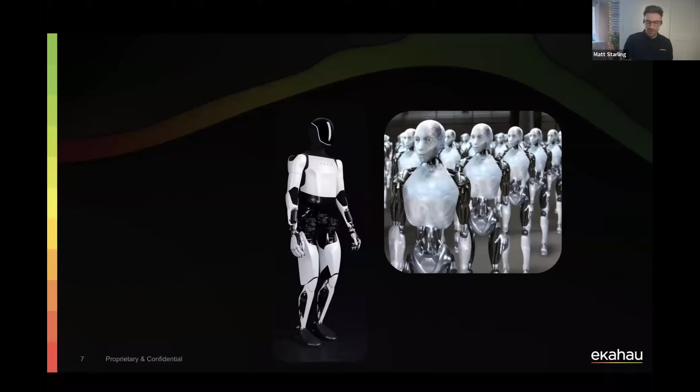But in reality, most of the way that I think AI in warehouses and distribution centers is being used, it's more like robots in this kind of scenario, helping move things along, build things, and ultimately we're going to see a much bigger demand on networks with the use of AI and these kinds of machines there.

I, Robot is a new film? Geez, I'm old. Okay. Actually, I think I saw when I was doing some research here, there might be an I, Robot 2 coming out, which could be quite interesting as well.

Okay, so natural language processing is what powers things like voice assistants. So if I was to say, hey Siri, play some house music, or Alexa, turn off the lights, did I trigger anyone's assistant? I can see my Siri is trying to go mad and it's about to put on some mix, now playing on Spotify. I don't know if you can hear that in the background or not, but yes, I've managed to get my assistant going.

But yes, those are some of the ways that we can leverage AI and natural language processing, or even talking to these, I want to say chatbots, but probably not the right term. But I think like ChatGPT, Marvis, Grok, those kinds of things. Are there any others out there? What's your preferred AI chatbot solution? Do you use ChatGPT, Grok, Marvis? Is it something else?

Let us know if I missed anything in the chat there.

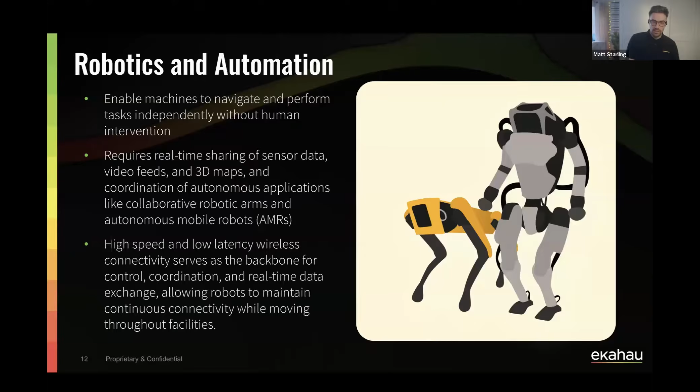And Wes, I think you have a story about a customer you worked with quite recently with similar devices and the importance of having a good Wi-Fi network for those machines. Yeah, there's been this trend of, with newer generations of Wi-Fi, you have more bandwidth capabilities, you can enable AR, VR type use cases. And I've always thought this is kind of fluff. But we have customers who actually do it.

So with robots on Wi-Fi, just transmitting immense amounts of data, telemetry, from a development standpoint as well as day-to-day operations, even 5 gig is a struggle. So 6 gig has been what has enabled this use case. But it's to support the AI that's native on that robot.

Yeah. I think ultimately with more and more network devices, AI devices, the need for a better performing wireless network has never been greater. And take into consideration the management of QoS. If you don't implement QoS on your wireless and wired network, there is a real risk that some of these applications and devices are not going to get prioritized, and likely some non-business critical applications may end up winning the chance to transmit their data over the air and across the network.

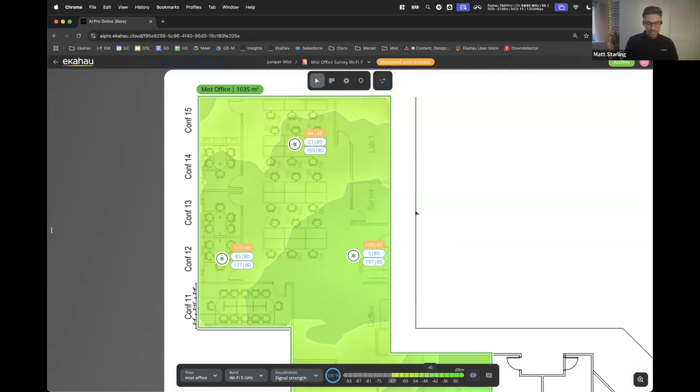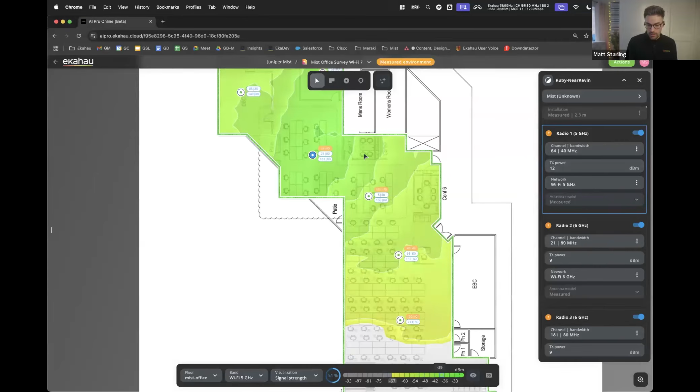So this is the survey data in Ekahau AI Pro Online, and I've not drawn any walls here. I've not drawn any obstacles or anything like that. And a question that we get asked a lot as well is, can the Sidekick 2 survey Wi-Fi 7 access points? And what you can see here is we have Wi-Fi 7 access points from Mist. So you can see the coverage now coming from this access point, and you can see 6 gigahertz and 5 gigahertz, 2.4, whatever you want.

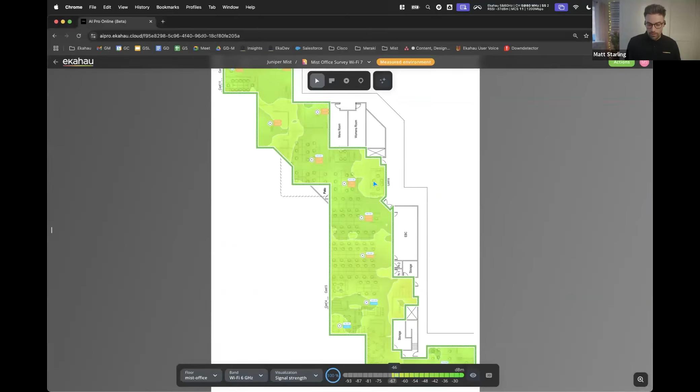So the short answer is yes, Sidekick 2 can measure and validate your Wi-Fi 7 access points. The main thing is that it scans across 2.4, 5, and 6 gigahertz. So Mist have deployed pretty much Wi-Fi 7 access points all throughout their office. There was just a couple of access points down here that are not actually Wi-Fi 7.

And what I wanted to show you that you can do with Ekahau AI Pro Online is if I click on this access point, let's say, for example, they want to upgrade this AP to Wi-Fi 7, but maybe they want to relocate it to a different location, perhaps put it inside this meeting room. Traditionally, what I would have to do before is draw all of the walls, all of the windows, all of the attenuation objects, make sure I've configured them accurately, and then I'd be able to simulate and see changes in my environment. But what I can actually do now is I can just grab the access point and move it.

I know everyone at home is losing their minds to the house music that Siri is still playing from earlier.

But no, this is really cool. So the Ekahau AI Pro Online is using measured survey data from Sidekick 2 and AI machine learning to understand how RF propagates in the space, and then you can account for changes and moving things around into different positions. We know when there's walls, we know when you've got heavy attenuation objects and things like that.

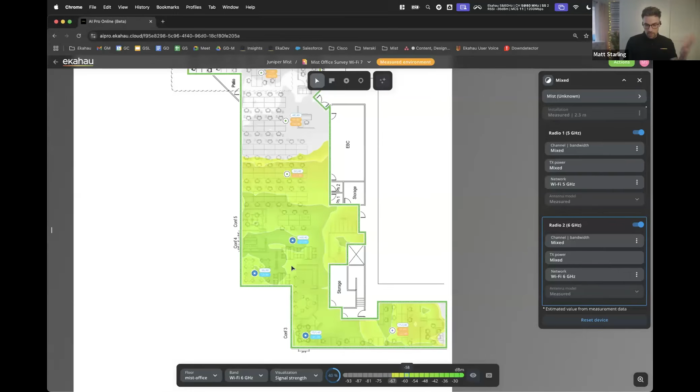So maybe Wes wants to know what is the coverage going to look like if I swap out, I think these are maybe AP45s, if we swap them for the AP47. So I've just grabbed those 3 access points. And what I can do now is I can just select Mist as the vendor, and I can scroll down. I can take a look at the AP47. And as soon as I select it, you see it's now instantly changed to Mist AP47s. And again, if you want to make some changes, like move them around, you can still do that.

So the way that a lot of people are using this functionality in Ekahau AI Pro Online right now is that, let's say that you've got an older 2.4 and 5 gigahertz network. It's due for a Wi-Fi refresh and upgrade lifecycle. Wes mentioned earlier how important 6 gigahertz is, so we want to upgrade to 6 gigahertz access points. Even if you survey and measure a 2.4 and 5 only network, you can simulate upgrading to a 6 gigahertz capable access point using this, and you will see the 6 gigahertz heat maps. So that's pretty cool.

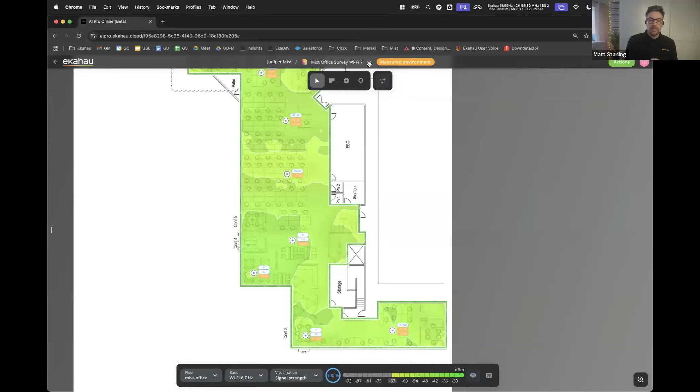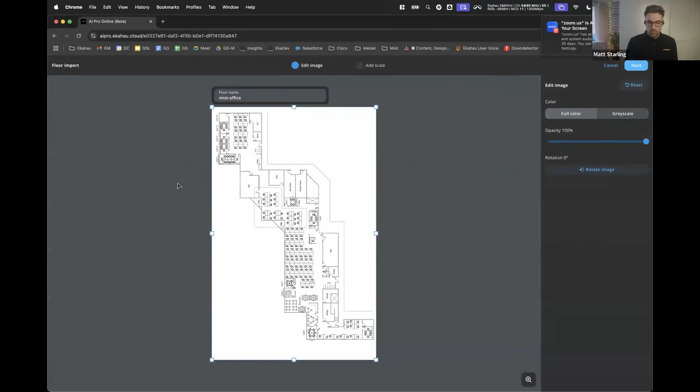Let me show you another way that we use AI in Ekahau AI Pro Online. So let's say that we couldn't get Mike to the Mist office for the webinar live demo, and we wanted to design Wi-Fi 7, but from scratch, like that traditional methodology of uploading a floor plan, scale, draw your walls and obstacles, etc. So I'm going to design from scratch. I'm going to pick the Mist office. You can see that this is just a PNG file, so no CAD, no PDF, flat PNG file. I'm going to hit open, import the floor plan, and if I needed to now, I can decolor, I can rotate, etc., but this is all good.

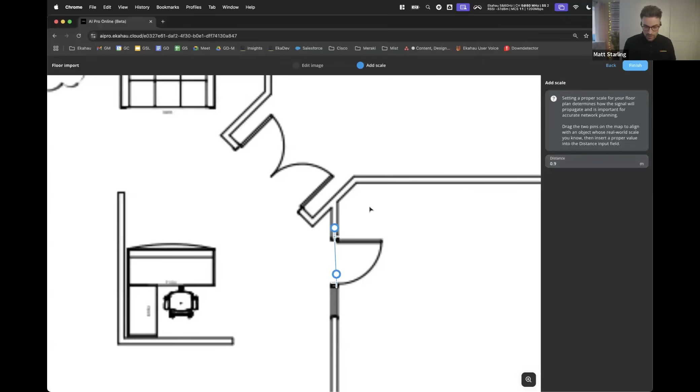And I'm going to give it a scale, and Wes assured me that their EBC room door is 0.9 meters in width for a scale. I know everyone thinks I am a terrible Wi-Fi designer now because I keep using doors as my scales, which I know that we shouldn't be doing, but never mind. I trust Wes. So now that I've finished adding my floors, I can simply hit finish.

And now, quick question to everybody in the chat: how long would it take you to manually draw all of these walls, doors, windows, and obstacles for this floor plan? 10 minutes, 20 minutes, 30 minutes, an hour, 2 hours, 1 day, forever? Yeah, okay. An hour, 1 month, 30 minutes, 10 minutes.

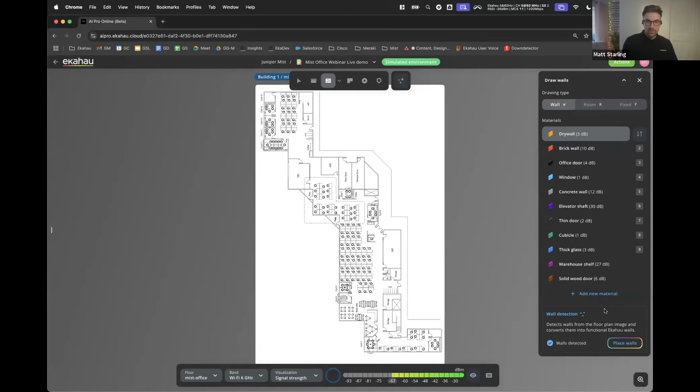Okay, some people are pretty fast wall drawers, but okay, even if someone said like 15, 20 minutes, too much. But did you notice down here, whilst I was trying to buy myself a little bit of time, we have this wall detection here. So even on a flat PNG file, we use AI to scan the floor plan, and now I can simply hit place walls, and we're going to place the walls on the floor plan, even on a PNG file.

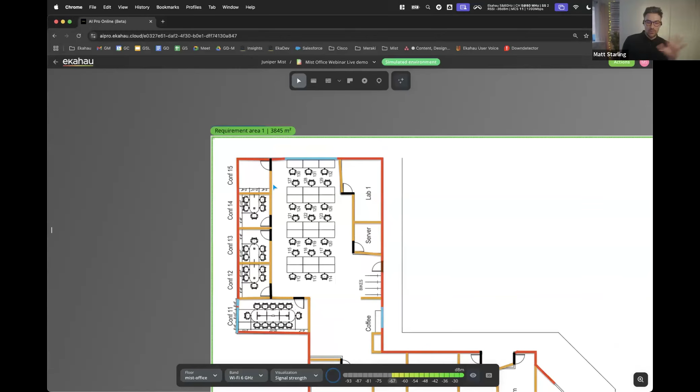And if we inspect this, look at how good of a job this has done. Like, this is crazy to me as well. It's not just done one type of wall type throughout the whole floor plan. It's done brick walls for the outer walls. We've got windows, we've got drywall, we've got doors, and it's done such a good job.

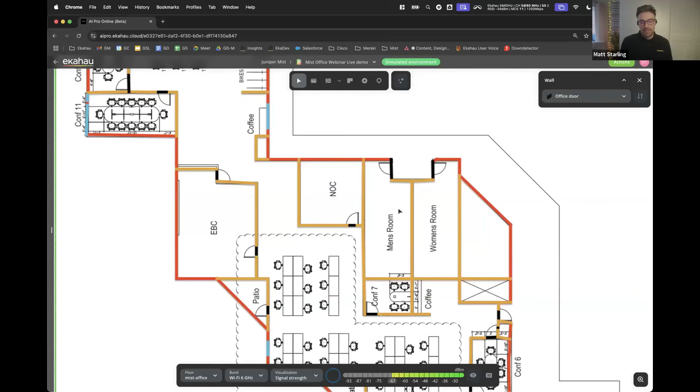Now, don't get me wrong, if I'm being pedantic, which of course I always am, I would come in and I would look at that and go, oh yeah, you know what, I need to fix that a little bit and fix that a little bit. Oh, and this wall here didn't quite get drawn, but I can come here and spend, I don't know, 30 seconds tidying this up a little bit. I can go into 3D, make sure this has been built and done properly. And I'm like, yeah, this does look good to me.

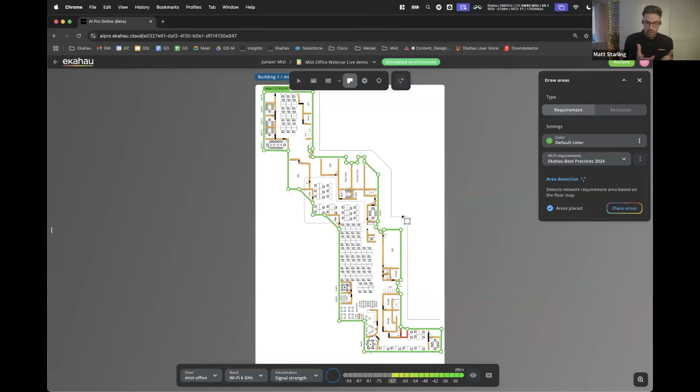So if I was to place access points now, you would see coverage would go everywhere and bleed outside of where the actual office is. So again, we can use our area tool, and we have this area detection. At the moment, you can see this green area across the whole floor plan. So now if I hit place areas, watch what it does. It now snaps to the floor plan too. So again, this is how we're using AI and some automation to just make your lives a bit faster and a bit easier and save you a bit of manual time.

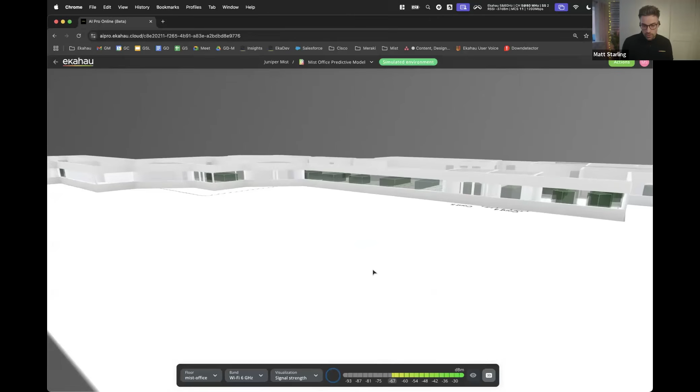So I'm going to jump into this version of the file that I built the other day, because we don't yet have attenuation object detection, which is coming soon actually in AI Pro Online. It's basically the same file, but I've drawn in the desks and stuff, because I think this looks really cool and nice in 3D. So you can see here that we've just got the floor plan. We've not done anything else.

So why don't we use our AI auto planner and see how many Mist access points we might need to cover this space. So what I can do is come in here, search Mist. Let me pick the AP47, hit enter and place devices. So now it looks at the coverage, the channels, and it saves the results, and it's placed some access points for us on the map. Brilliant.

So that was one way of using the AI auto planner, and I can see the Wi-Fi 7 access points throughout, but I actually just want to do something else very quickly. I'm just going to delete these access points and start again from scratch. What I want to show you is that you can do this completely manually, or what I would refer to as semi-automatic, and also automatic. So let's say that this is a good suggestion to place this access point in this meeting room. I would place an AP here.

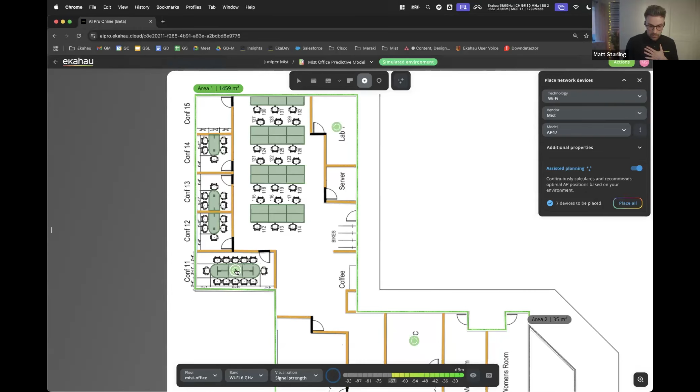So I simply place an access point in this location, but it's also recommended to place one in this lab room. And now Wes might know, you know what, Matt, we can't get a cable into the lab room, or we can't mount an AP in here. So it doesn't really make sense to place an access point in here. Or actually, let me use this room here as another example.

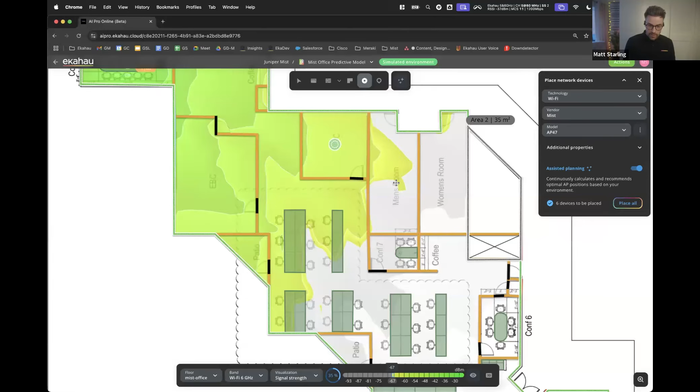So what will happen if I decide to place an access point in the most important area in the office? When I place it here, the AI will then recalculate and come up with new suggested locations. So if I don't pick the exact location that we're recommending, it doesn't keep the old position. It will actually look at that and then make recommendations and suggest other ones. So you can do this manually, automatically, semi-automatically, whatever your preference is.

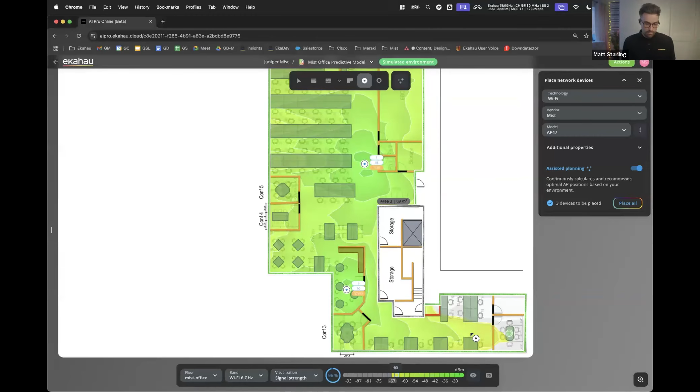And then again, of course, if you want to then review your space and you can see it in 3D, I never get tired of looking at it. It looks very nice and cool to me. Okay, so that was a couple of ways that we can leverage AI machine learning.

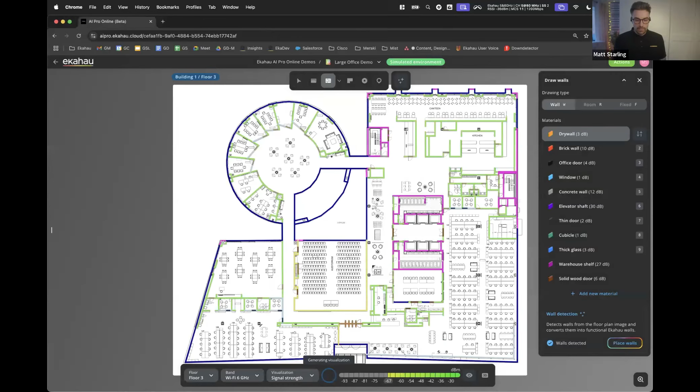And I want to show you a couple of new features in Ekahau as well. So I'm going to jump into a large office demo file that I prepared. And what we've got here, let me just quickly go into 3D. You can see that we've got everything built out ready. So we've got all of our walls, doors, windows, furniture.

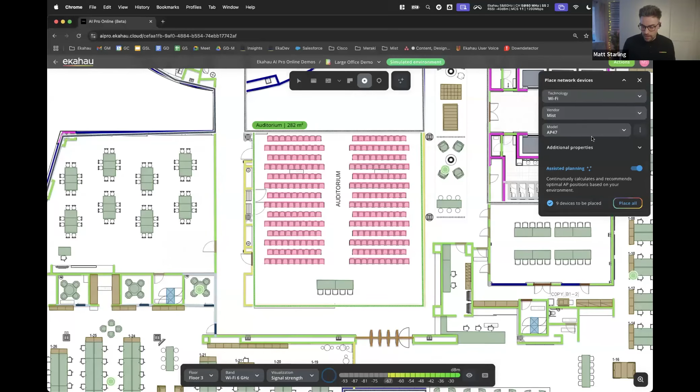And what I really want to pay close attention to is this auditorium. So we've got this auditorium space and I just want to design for here. So what I want to show you actually is if I place a Mist AP47 in the auditorium into this location, we can see that the signal strength goes pretty far. But we have a new feature available in AI Pro Online actually for capacity planning.

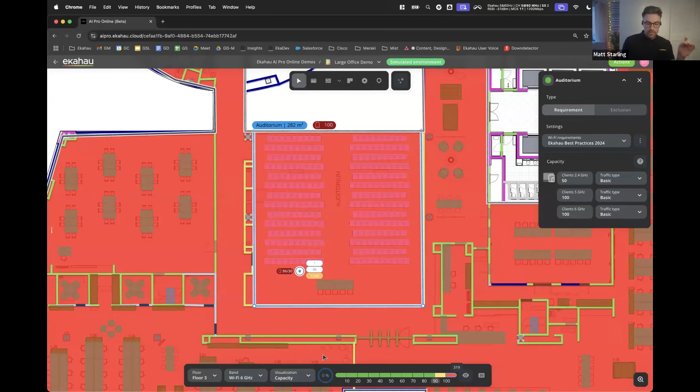So if I switch visualization now from coverage to capacity, you can see that it goes red. And if I click on the area, you can see that I've defined some requirements for the amount of devices in this area. So I think there's like 250 odd seats. So I put 250 devices, some on 2.4 and the rest across 5 and 6 gigahertz. So at the moment, coverage in the auditorium is fine using the Mist AP47, but capacity is failing.

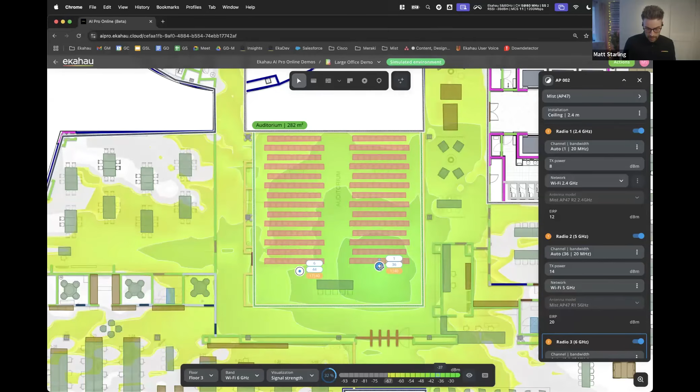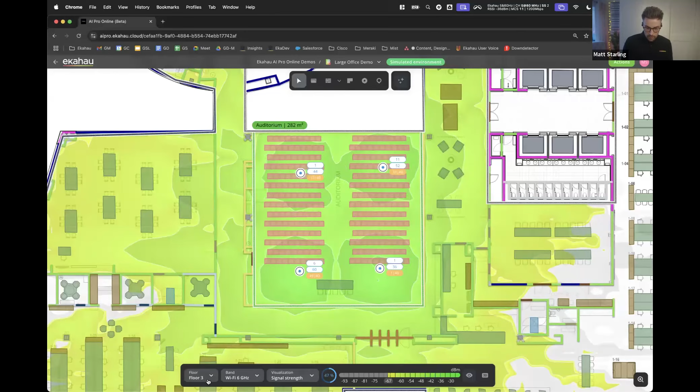So now if I just copy and paste that, I need to add a few more access points. Let me add them in over here and then one over here. Okay, so we've got 4 access points in the auditorium. Let's see if we're now meeting our capacity requirements. And we are, okay? So we no longer have any more than 30 devices per radio. So this is now passing and meeting our capacity requirements, but we actually have something else new in Ekahau AI Pro Online called our inspect tool.

So I'm going to just go back to the signal strength view and click on the inspect tool. And what that does is if you place this on a map, it's going to show you the different access points that you could potentially be connected to. So the primary coverage and the secondary coverage. And let me just zoom in a little bit more.

And let me just show you again, if I move this, can you see... it's no good. I'm getting my finger out to point at my screen, like you guys and girls can see where I'm pointing on my screen.

But if you look at the top left of where my mouse is at the moment, you can see it says connected, and at the moment it doesn't recommend anywhere. Oh, down the bottom right now, you can see it's suggesting this would be the next best AP to roam to.

Well, actually, let's just do a little bit of a simulation. Let's say that I come down this hallway and you can see that I'm connected to the AP top left. As I walk in through this door and walk past that access point, at no point as I move around the auditorium does this suggest that a device is going to roam to another AP. So even though technically our capacity is good in here, the likelihood, from a client device perspective, of getting it to roam from one access point to another one is quite low. So most devices will come in and just stay connected to this access point.

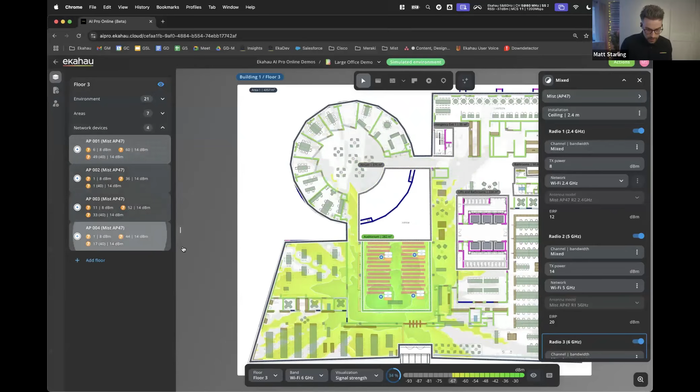You're gonna have to rely on the infrastructure. Maybe you can do some client balancing and move things around, but really you want to try and control this from an RF perspective. So you might be like, well, Matt, can we not just turn down the power of the access points? Okay, well, I hear all of your questions. Let me grab the devices and then let me turn down the transmit power on 5 and 6 to something like 8 and 8. Hit enter.

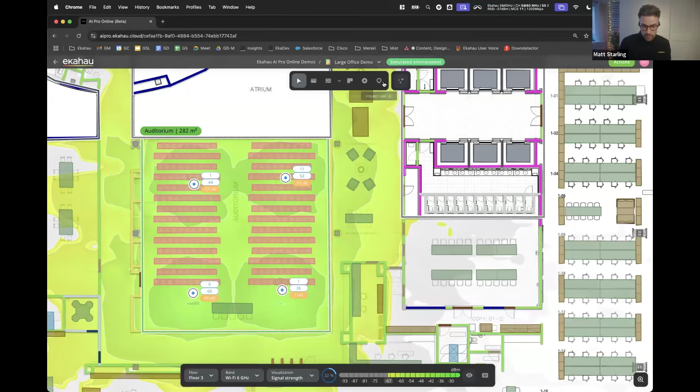And again, if I just zoom in for everybody, zoom in here. And now look at the coverage. You can still see that this access point is pretty much covering the auditorium really well. So if again, I go back to the inspect tool and simulate moving it around, at no point does that connected change.

What should we do differently in this scenario is leverage directional antennas. We want to use access points that can support directional antennas. Mist actually have a new access point, the AP47D, which has inbuilt directional antennas. So regardless if you're in Europe, US, or whatever, we can now use an access point that has inbuilt directionality.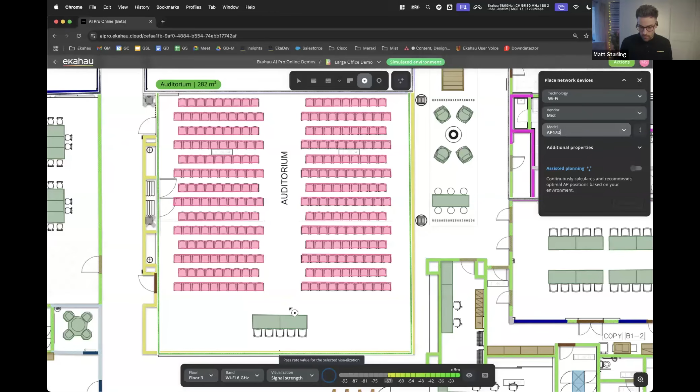So I'm going to pick the AP47D, and place it on the map, and change the transmit power down a little bit to 8 and 8, hit enter. And then let me put in the 4 access points in the same sort of locations.

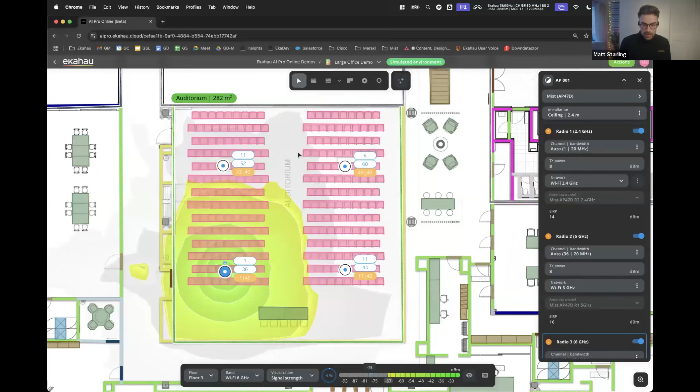Okay, cool. So now we can see the coverage from these access points. Let me go back to the inspect tool, zoom in a bit, and run the same scenario: let's say we've walked down that corridor and come in through here. We're currently connected to this AP in the top left-hand corner. But let's say I want to go and sit in the bottom right-hand corner.

As I walk over here, you can see now I've actually roamed to this access point. Again, this is all theoretical, but having access points that can control the cell sizes of the radios by antennas, when you're designing for auditoriums, high density, things like that, this is a really good way that you can design to meet your capacity requirements.

So a quick demo that I just wanted to show everybody, and also I wanted to show off some of the cool new features that just came out this week that you might have missed, and you can now go and play around with yourselves.

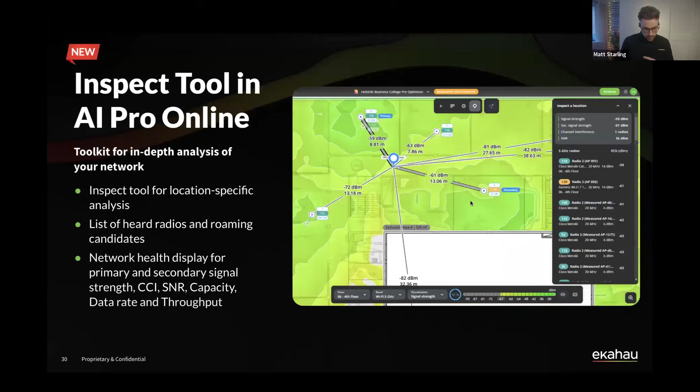Let me just jump back to some slides because the one thing I want to talk about is our integration with Juniper Mist. You can leverage Ekahau to provision your Juniper Mist dashboard, your floor plans, your AP locations, and some other things. So if you've got a site with lots of access points, once you've done a survey, we actually measure and know the real location of those access points. You can push that to the Mist dashboard.

And why not do another live demo? But this time, pressure's on Wes for this. I've done my live demos for today, so Wes is gonna show us. All right, demo guys, here we go.

So this is the same survey that our friend Mike Wade performed in the Mist office earlier in the week. I am in the Ekahau Cloud in Insights, and there is an integrations option. So this is taking the survey file that Mike performed, and it will push AP placements into Mist.

So I have the true Mist office. We have some APs on a floor plan, but we're going to ignore those for now. There's a bunch of APs not on a floor plan, and we're going to ignore this one too. We'll add a new floor plan and place the APs that we heard in the survey on the floor plan.

And so the way to do that is using this integrations button. We're going to export the AP locations. I guess there's also an option for the heat map, but we're going to do the AP locations as well.